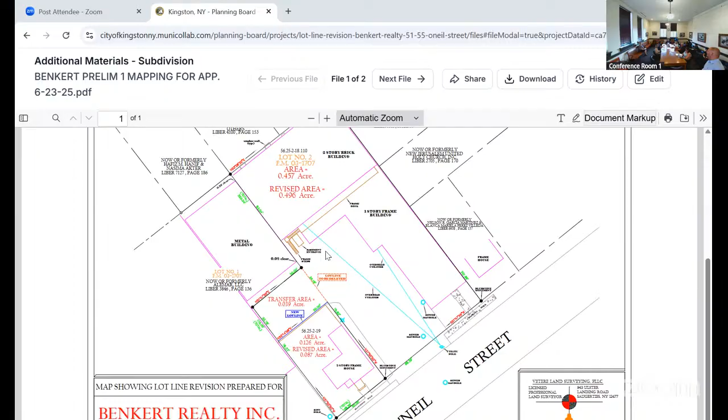Okay, so really it's just a final signature on policy 6 and submit the revised maps as we discussed this evening, 5 paper, 1 Mylar, his signature by the owner, for the chairman to sign, and then the Ulster County Clerk. Quick question, do you want the policy 6 and the board approval block, or do you want both? Because I feel like sometimes we get signatures here and then this is blank and the county asks why that's blank. That's happened to me maybe once in the last 6 months.

So there's an owner's signature block and a chairman's signature block. They should sign both. Okay, that's fine, so I just didn't know that for final maps, if I should be removing it. No, we can have a revised policy.

All right, so that is a motion. Do I have a second on that? Second by Andrew Harris. All in favor? Aye. Opposed? Carried. We're gonna do one more item before we get to you for Hooker Street, all right?

Okay, no problem. It's gonna be tabled anyway, so.

Item number 3 is 15 Apple Street, subdivision of the lands of IFMH LLC. Section block and lot is 48.312-2-10. Transect zone T3N, Ward 1, SEQR determination. Michael Vetere is the applicant, IFMH LLC is the owner.

Do we need to ask if anybody wants to speak on that, or can we just proceed? No, I would just, you're going to table it. Yeah, the applicant has requested this item be tabled because they're going to reconfigure the subdivision itself. The layout will be changing, so it'll continue to be a public hearing next month with the new proposal. Mike is working on that for them too, so he's gonna do that.

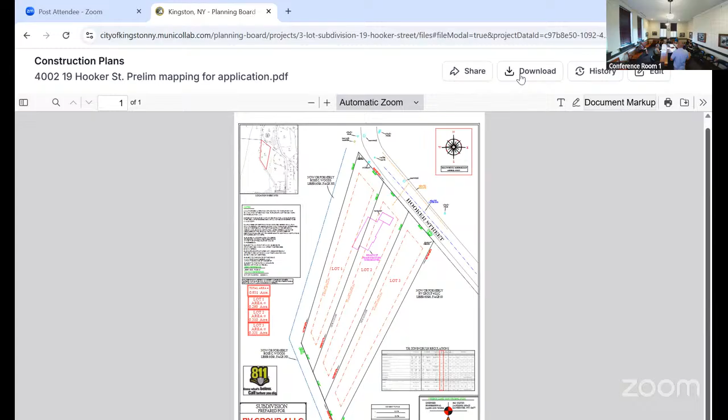Sue's got some conditions: with board policy 6, with the resultant parcel descriptions, including the easement language within the 2 parcels that would cover. Demolition of the existing structure must be completed prior to the chairman's signature on the final plat before filing. We'll need 1 Mylar and 5 paper copies with the owner's signature. Condition of the New York State DEC wetland jurisdictional letter being received, submitting the revised maps showing that shared common easement driveway, and DPW's approval on the curb cuts.

But that's a motion. Do I have a second? Second by Sage Dukert. All in favor? Aye. Aye. Opposed? Carried. So thank you, and if you can just give me those notes eventually.

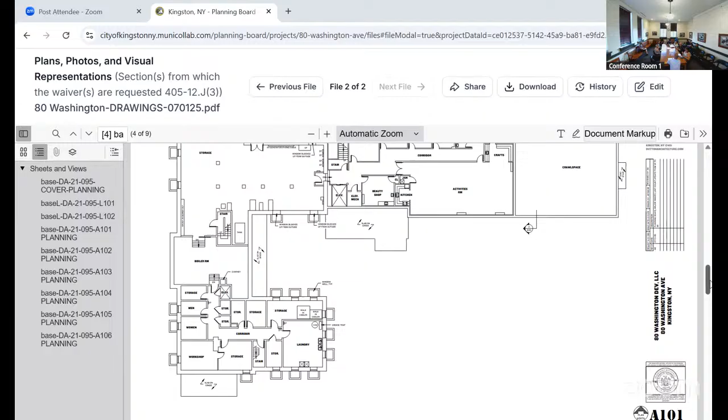The additional 2 units came out of the SHPO process, where they asked us to maintain the original lobby and reconfigure things a little bit. Going through financing and looking at everything, in that shuffle we found a space that's in the basement, but it's not really a basement. It's on the George Washington School side.

Large windows, lots of natural light. So here's another potential studio. There would be no changes to the exterior. The board granted the approval. There's one additional unit on the half level down, actually.

Hello there, welcome. Have some.

There's a half flight of stairs here that brings you right up to one of the main circulation corridors. Did receive staff notes, and there was a question asked: would this be for the building super?

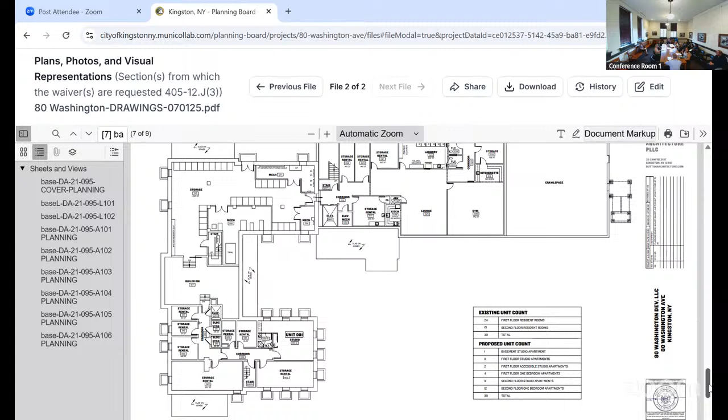The other unit being added is on the first level, basically above the area we just pointed out. It was a one-bedroom, correct, and it's being converted to 2 studios. So that's the other additional studio unit that's being added.

And that's effectively it. I think everything else is staying virtually the same, outside and inside, in terms of the layout. Those are the changes.

Pretty subtle. I don't see it as a problem if it doesn't impact safety and doesn't change the structure. Having the diversity of the type of living spaces, studios, I think that's a positive thing, especially for the hospitality industry.

Just a couple of quick questions, just to confirm, because obviously we're still committing to the 15% affordable and 5% workforce. Yep, that was in the original, so the only change there would be 6 affordable now and 2 workforce with the additional units. That's in the drafted resolution, which is also in your packets, that you can see.

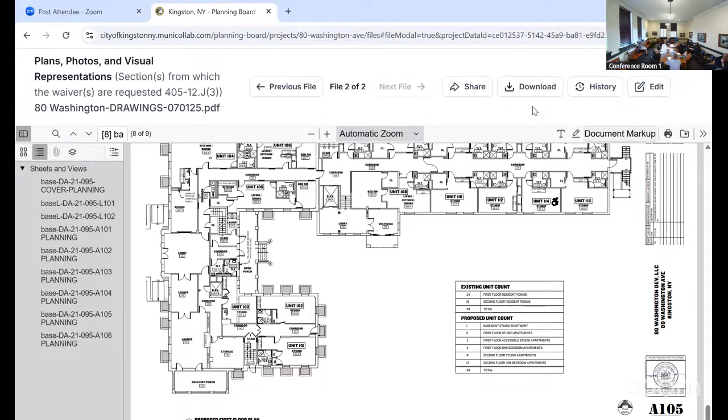So, resolution of the City of Kingston Planning Board amending the conditional approval of the site plan and major waiver to increase units from 37 to 39 for 80 Washington Avenue, Kingston, New York, 12401, section block and lot 56.107-4-12.

And whereas the original planning board resolution on October 16, 2023, included a number of conditions and findings granting a waiver from section 405-12 J3, which is multiplex allowed intensity, for 37 residential units.

And whereas since the original approval, the owner has successfully had the building placed on the State and National Register of Historic Places and has begun necessary demo and clean out to prepare for construction. And whereas in working with the State Office of Historic Preservation to preserve additional interior architectural features and reviewing the approved interior plans, the applicants are seeking amendment to the approved site plan and major waiver to add 2 additional units.

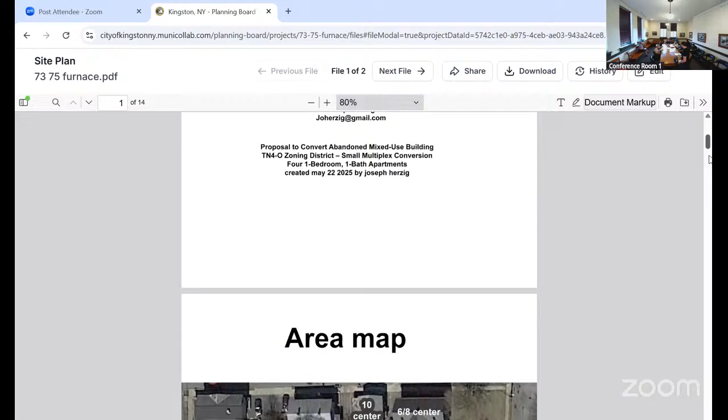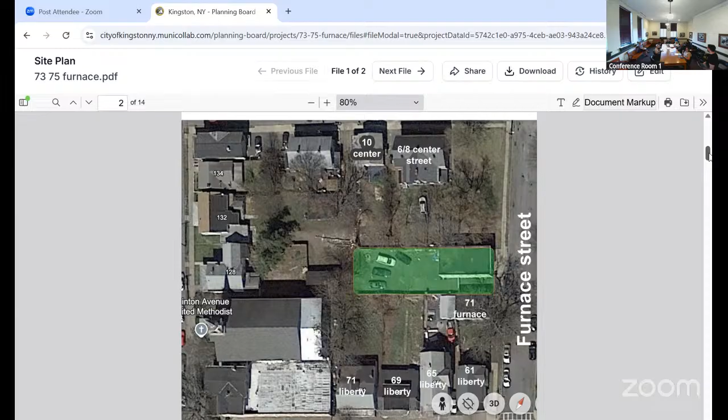So I'll just go through what you originally submitted, and if you want me to speed it up or move along, just let me know.

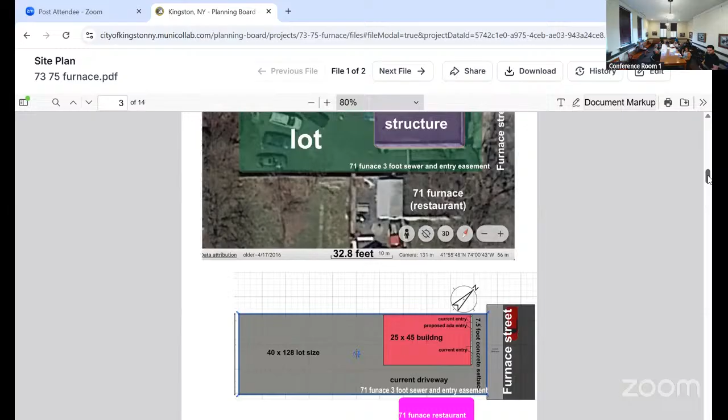So we kept the existing structure as is. This little easement over here isn't really relevant because we're keeping this as a driveway, but the neighbor could use it. This is just a diagram.

So I guess this is the first decision the planning board will have to make. We're trying to keep the very large backyard over here, and in a perfect world we'd put in 4 parking spots, but it gets a little tight with technicalities, especially because we need a handicap spot. So we want to do 2 spots over here, and there are 2 possible configurations.

One configuration takes up this area and has a lot of asphalt in the back. The advantage is that we have the full 24 feet required for the lane before the parking, according to zoning laws. The problem is that we go over the required maximum coverage of 70%, and I think it personally looks a little ugly to have that much asphalt.

I want to show you the second option. This is a much more compact way of having these parking spots. The compromise is that we only have 22 feet instead of 24 feet, but with this option the 22 feet can be authorized with the city engineer's approval. That would be one condition.

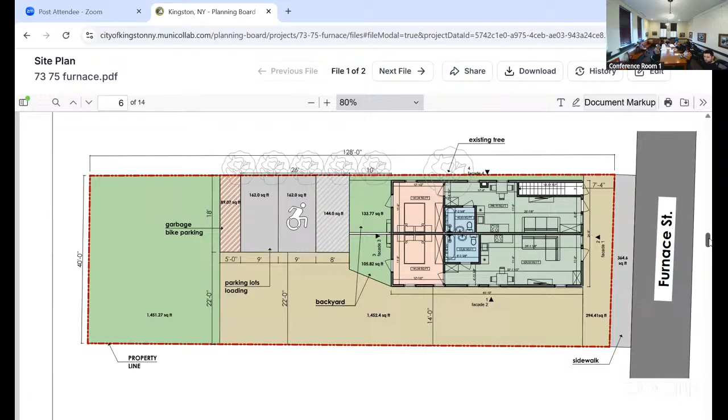So, Joe, here is the original. Do you want me to show this and then we'll show the other one? Yes, okay.

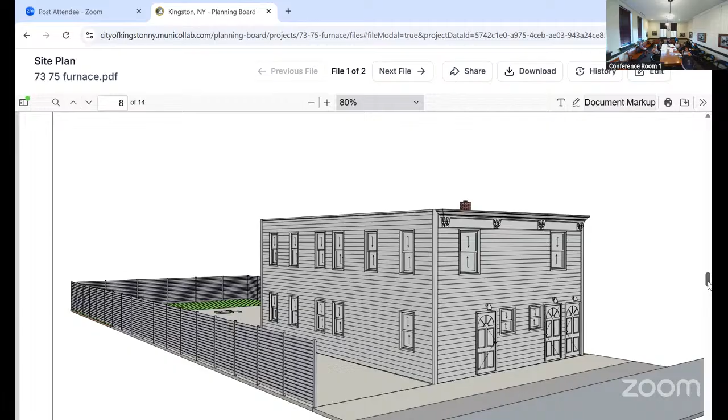So this is where I requested a waiver. Basically, the existing facade of the building looks like this, minus this door. We have a picture of it, it will make things a lot easier.

So this is the existing facade of the building. The upper floor I'm keeping exactly the same. This door I'm keeping over here, this door I'm keeping over here. But I'm adding a second door over here.

My rationale was if I have two — these apartments are like ground floor apartments with no stairs going up. I figured might as well make it a little more accessible if I have a door outside instead of making a door from inside the hallway to a narrow hallway. So I wanted to put this third door in front.

The problem is that this changes the facade a little bit, and being that this facade does not conform to the transparency requirements, I would have to get a waiver from you if I want to keep it as is with the configuration we're trying to do right now. Maybe go back to that picture later so you see it.

Is the transparency requirement just for the street side? Yes, this is facing the street. So the transparency requirement is 30% for the bottom floor, 20% for the top floor. The top floor we hope to keep as is. The bottom floor, obviously, since we're making changes, I would have to get a waiver if I want to keep it as is.

It's quite difficult to make much more windows at the bottom floor because if you look at the interior layout, there's a closet over here, and there isn't that much more space for a window.

That's a bathroom location, it's not there? Bathroom location, but it's facing the street, so I don't want to make it all the way down to the bottom. Oh, this is a closet. Yeah, this is the kitchen. Oh, kitchens, okay.

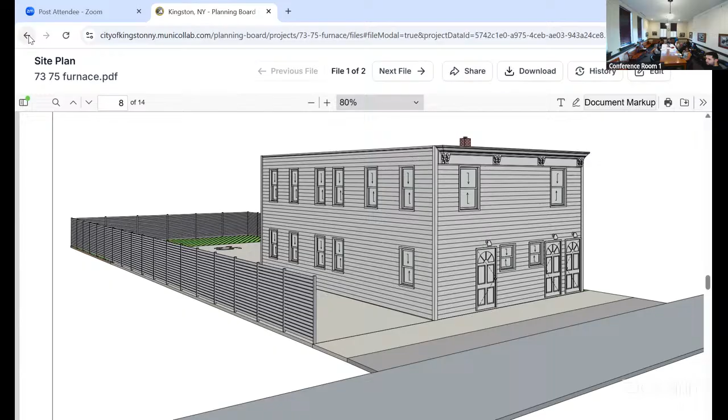Can you flip to this? The other one. Yeah. Right there.

So this is a revised elevation that was submitted today, that just shows basically going back to the two door entries. This is showing the post boxes on each one. So the one to the left would go to the ground floor unit directly in, and that would probably be your ADA adaptable unit. The other would go in and then into a small foyer area and go in that way.

So with this proposal, does that change the interior layout? Ever so slightly. It just means that on this floor, you have to go into the hallway and then make a left turn, instead of going straight.

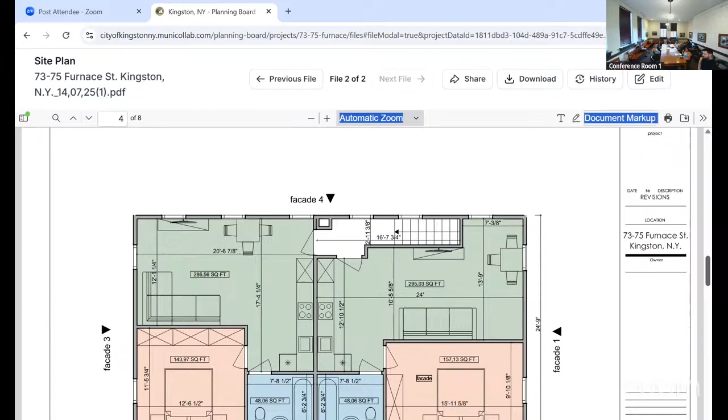No, it's fine. So with the original, you lose the window. Yes. With the three doors, you gain a window, but the interior is the same. Now the total window space is the same, and the interior is basically the same. You're coming from here.

I was going to put a window into here. If I keep the original, that would require transparency review, and if that waiver would be granted to me, then I would just go back to not putting any windows and keep everything as is.

So does one kitchen lose a window then? No, the kitchens are centrally located right there. You see, there's a window here, there's a window here, there's a window here, in the middle of the unit. That's the living room in the front. Oh, okay, okay, yeah.

So for the living room, in one configuration we had a door right over here, and this window got smaller, and we added a window over here. The window square footage is exactly the same. In this configuration, we're making no changes to the front - I would just have the door over here, keep this existing large window, and if you guys would let me, I'd add another window over here. But if that would trigger the 30% requirement, that would be a little more difficult.

Okay, so where the arrow is right now, you're sitting on it - so you lose a window there, but the living room gets a window on the bottom there.

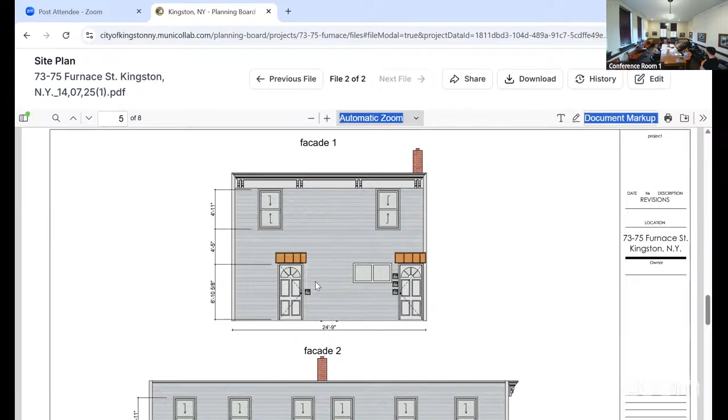The other one added a third door, and what he's saying is he would add another window here if the board would also approve the waiver. And it's not realistic for those windows to go down to the ground because it's the kitchen.

Yeah, I think the lower ground floor having some privacy over here, it's not ideal. And the closet that prevents this one from having a window on this side - is that closet already there, or is it a closet that has to be built?

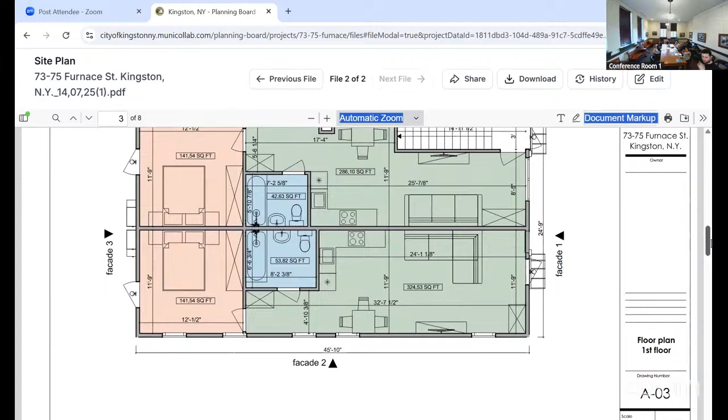The closet's not there, but I guess I could technically change things around. Could the closet go where the other little window would be, and then a window go where the closet is? You're saying the closet should go over on the other side, on the other side of the door? Yes, split. There's no reason you couldn't get a window in - I think that would look better. You think it would look better to have a window at the end?

I know existing photographs of this building show that this whole front area used to be a garage, so it should be quite easy to stick something in over here. There are probably some supports down over here. It will probably be a little more difficult to stick a window into the edges. But once they open up the wall and see what's going on over here, I would love to.

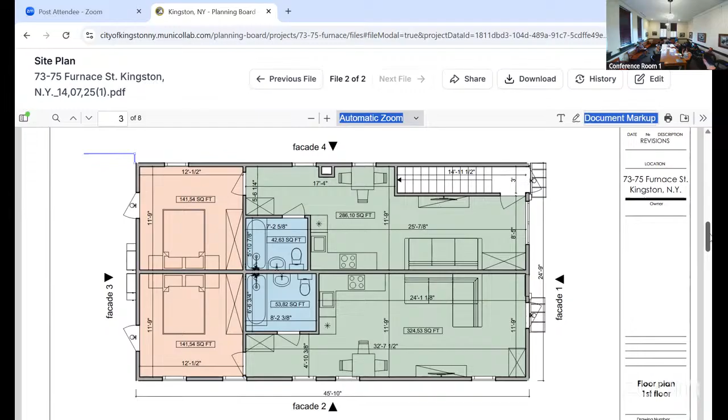I don't necessarily have an issue with the new layout. The thing I would like to see is some landscaping - he's talking about creating a dooryard front style building.

So there is quite a bit of space in front of this building. As you said, where the door on the left is used to be a garage door. So in front of this building is one entire curb cut, and one thing we're looking at is to remove that curb cut to avoid having somebody just pull up and park right in front of the building on the sidewalk there.

If you look at some of the adjacent properties along the street, there's a sidewalk with a tree, with a lawn between the sidewalk and the curb. So if you go down, we'd like to see that pattern extended down to the side of the building, and then you keep your curb cut where you ingress and egress. Those were two comments we had at staff level.

Adding that to the front and putting some low-level landscaping in the front would really create more of that residential dooryard feel, which he's trying to achieve. So I think it's a great idea - I would love to add landscaping over here between the two doors.

Yeah, and then the other thing, as I was saying, was to take that curb cut, which starts basically the whole front - it's a lowered curb - and raise that curb back up, make the sidewalk just continue down like it does along the entire street there, until you get to the commercial building next door. And obviously there's my driveway over here.

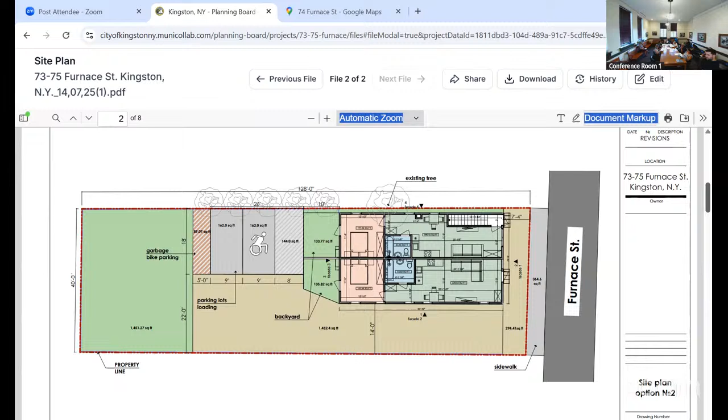Okay, and you have mini split condensers on there? So right now this building is covered in mini split condensers from all sides. Okay. There's a hum coming off the building right now. You know what? No, just kidding.

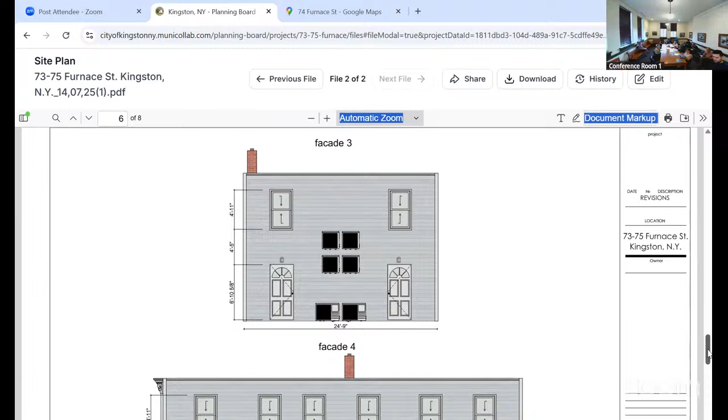Anyway, but yeah, we're trying to put them all back. I spoke to some HVAC companies and they're fine with the ideas. And that's code required. Yeah, it's most convenient, I think it's just ugly to put it inside. Okay.

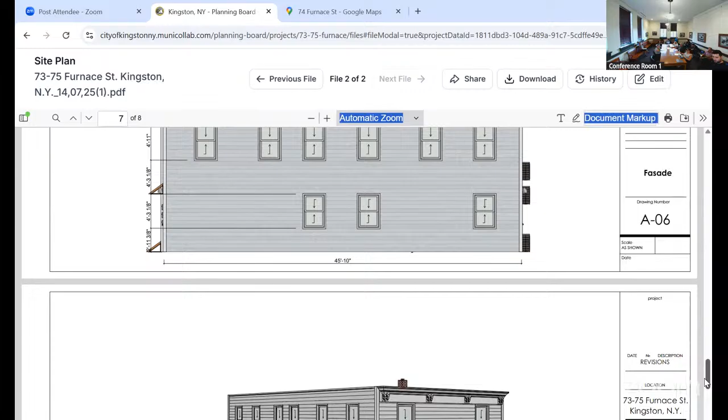We're happy you're doing something with this building, that's what I'm hearing, because this building has been before us for different things. So it's good that this looks good. So this is the last time before you guys. Yeah, you got anything else? Any other questions from the floor? Okay, that's what I was thinking.

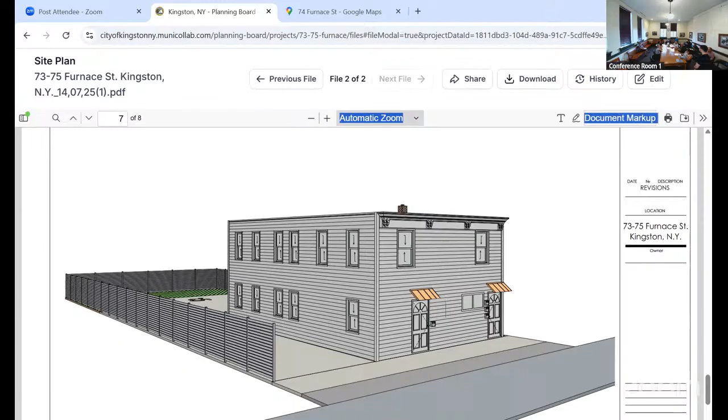So that's a motion. Second? Second by Kyron. All in favor? Aye. Opposed? Carried. Okay, alright, move on.

One more thing. No, you can't leave this early. Come on. So, do you want me to read off the conditions?

Yeah, do that first. Okay, so there are board policies 4, 4A, 6, 7, 13, 18, 23, 24. The parking layout that was chosen will be with the spaces adjacent to the adjoining property. There's a 22-foot access aisle, which will require the city engineer's authorization. And they'll swap the handicapped access aisle with the parking space in the rear to allow better accessibility to the refuse and bike storage area. They'll add landscaping along the front of the building and continue the landscaping along the street edge in compliance with adjacent properties, and that will get approval at staff level.

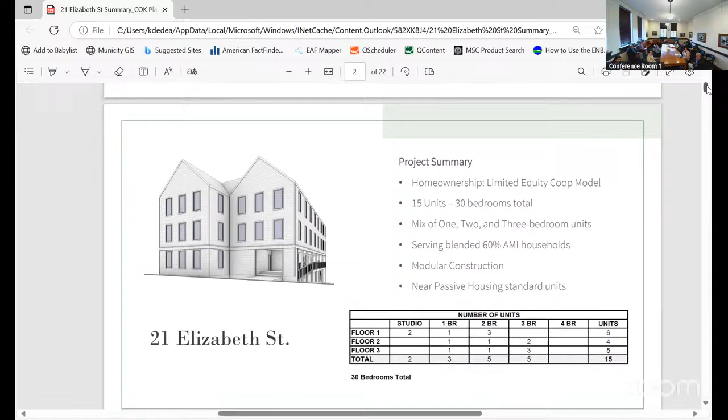We had an RFP, and the intent for the project is serving households at 60% AMI, which is about where the average income for City of Kingston residents is. So we wanted to make sure that was part of the project. As part of this proposal, we've got some innovative approaches using modular construction for the development, and a near passive house standard. That's a breakdown of the units by floor. Go to the next slide.

It's in the T4N transect, and part of the approval application process will be requesting, I think, 2 waivers now. From my understanding, that first floor height of 12-foot minimum to 10-foot minimum, it's coming down the line, so we may or may not need a waiver for that as well. But what we do need waivers for is moving from a maximum of 12 units for the building itself to 15 units.

The architecture team and the design team can explain why we want to take that approach for energy efficiency and other reasons. We also need a waiver in terms of the building depth, from 75 feet max to 112 feet. Right now the existing building is actually over that 75 foot already, so we're outside of that, but we need that waiver for the extension.

And then just the last piece before I hand it over: there's not a ton of room for parking on the site, so we had some concerns about that. We are in discussion with the Kingston City School District for an easement on the back of their parking lot that would allow parking space for our property. They seem amenable, and we're going to formally present that, I believe, in August.

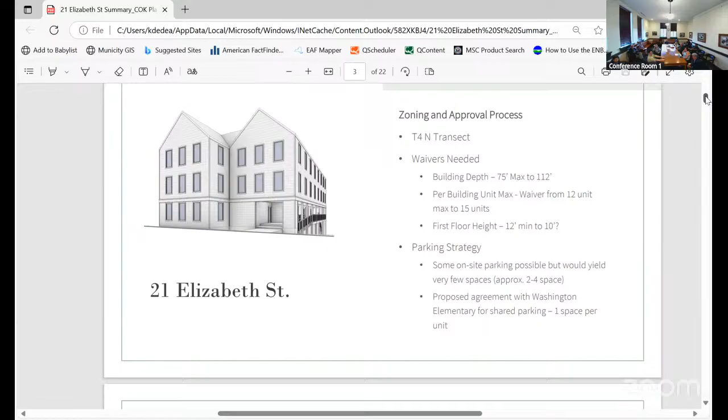And I guess the last piece I'll mention is that there's a general intent, even though it's not required, to move the project in line with the guidelines for the Kingston policy in terms of selection for homeownership. So we're trying to make sure that the majority of residents who end up owning the units are coming from Kingston, if possible.

The other entity not mentioned on the development team is the Ulster County Housing Development Corporation, which is likely to play a role here, similar to the role it played in the Golden Hill project. The legislature at its last meeting approved the ability for that development corporation to take title to the property if and when we're able to move forward.

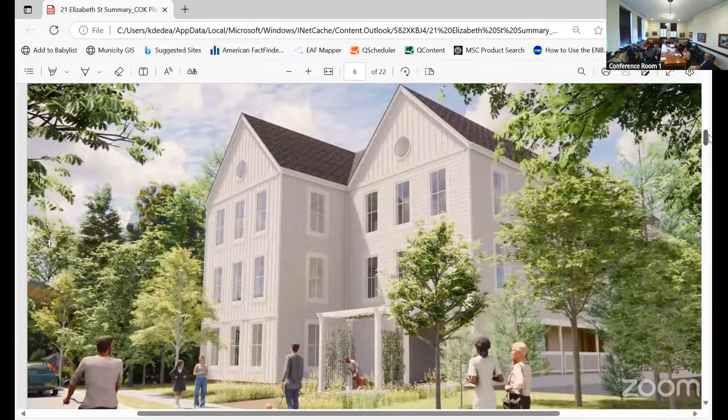Okay, or what might be—so these are ownership units. It means that people need to desire them, they need to buy it, and then they'll take care of them and call them home. So they need to be designed as the kind of housing that people aspire to live in. And that's the way we started with the apartments themselves, because ultimately, I know this is about the context and the urbanism, but it's also about what it's like to live in this house.

And so we've designed them according to contemporary standards of amenity and space and performance, including the passive house standards, because those are actually great for the long-term maintenance of place. And it's great, especially for 60% AMI homeowners. It's going to control their utility costs in a large way over time. And that's really important. So like everything, there are many consequences to any move you make in design.

Then these units really need to come together into a building that gives them a great sense of identity and that it takes its place as a really good neighbor in the community, on the street. And that's obviously the focus of what we want to discuss today. How is it going to be that good neighbor? And actually, the performance-based code has helped us a lot in describing what that means.

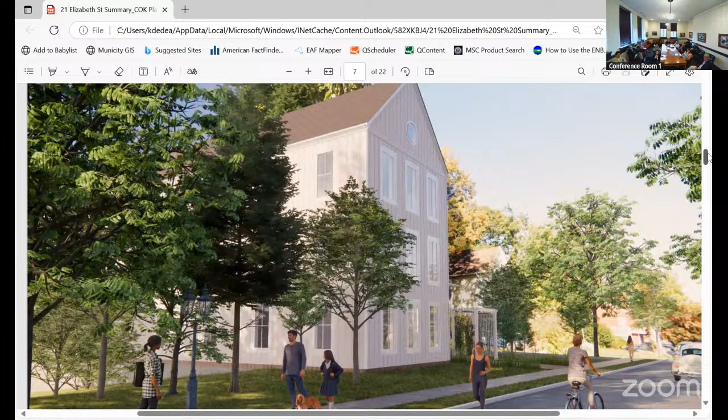Oh, we have 2, great. So here you see - I forgot we have this on the front - you can really see when you're coming from the corner, and it works a little bit the other way too. It's really introduced, and you can see the first volume, the first twin, is introduced as the identity of the project. And then you can see another house down the street a bit that is similar, and we have more images. You can also see here the slope.

Which is another part that made it a little difficult to get the views, and also has something to do with the parking, the difficulty of parking all over the site, because you can see the slope that goes down all the way to the end.

So the next slide. Oh wow, these are all front. This is fabulous. So I thought they were on my presentation, they were at the end. I didn't realize they were front here. That makes it really easy. So they're twin houses already, right? We're just another set of twins.

They're across the street. And then you see the massing, the 3 windows, and you also see the pitch, the kind of very prominent dormer with a little window in it, and that house, which is our neighbor, et cetera. And these other houses are right across the street from us. Oh well, the one is next door.

What you see here is how, first of all, the porch is covered, right? So that means you can hang out there. There's a bench there, for if you need to get a taxi, or you're waiting for a friend, or you just want to hang out. The beginning of the porch is quite wide, and it's a kind of true gathering space.

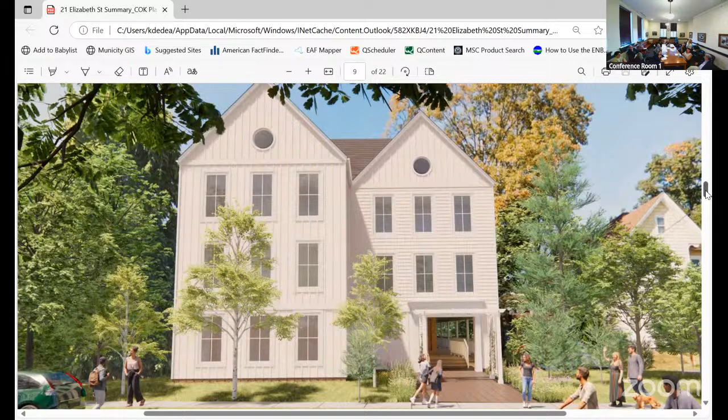And then next to it is the ramp. So the ramp was given, we have 4 ADA units on the ground floor that were all directly accessed from the porch. So that is really part of everyone melded in that experience.

And then, but you know what? It's never just about ADA, because if you have a kid with a stroller, right? Or you have a shopping cart, no matter what your age, or if you're just a little shaky on your feet, that is gonna be a great use. Of course, I'm sure kids will just run up and down too.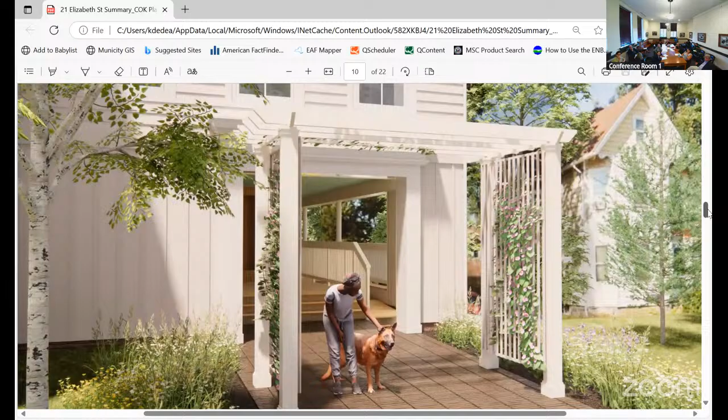And you see it looking all the way down the site, and I bet the next image is a little close up of that experience. And then you see there's the house next door, with the one with the big peak, which is set almost back just a little bit further, but not much further than our design at the moment. It's just the trellis pulls out, and you can see the prospect to the trees through the porch.

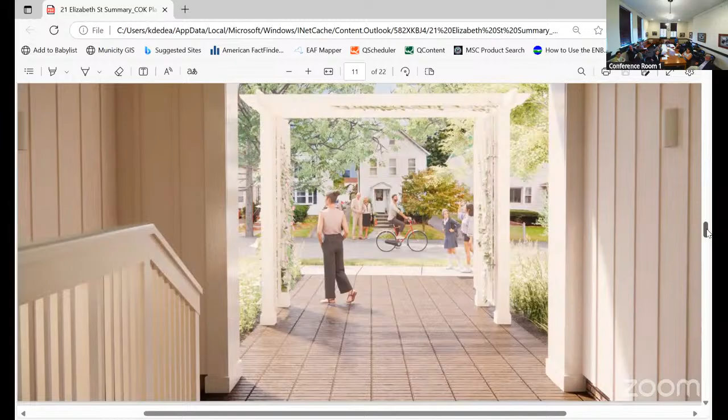Yeah, keep going, thank you. Was that Suzanne? And here's what I thought was going to come next, where you see the ramp and the stair and the covered kind of vestibule that addresses the street, and the threshold of the arbor and that house across the street.

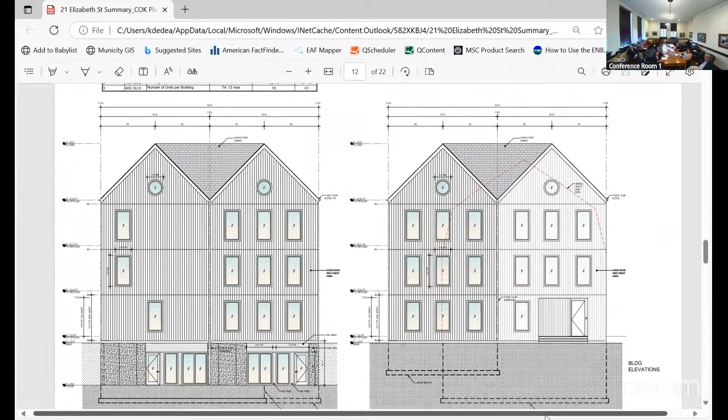So in terms of the slope of the site, it makes it very difficult to do certain things like park, but it gives back. And what it gives back is an extra story on the ground, at ground level at the rear, which just opens directly out onto the rear and the yards. And so we've captured it for our community spaces.

And we have two: we have a community room, and we have a kind of daycare, nursery, after school room, that the co-op will need to structure in terms of how it actually runs it. But we're providing not one, but those two spaces for the community. So that's really the point of these.

Plus it's showing in the red dot where the boarding house sits. Capture some of that space for storage for the units. Oh yes, then so those are these, yes, I'm sorry. That's a very good point.

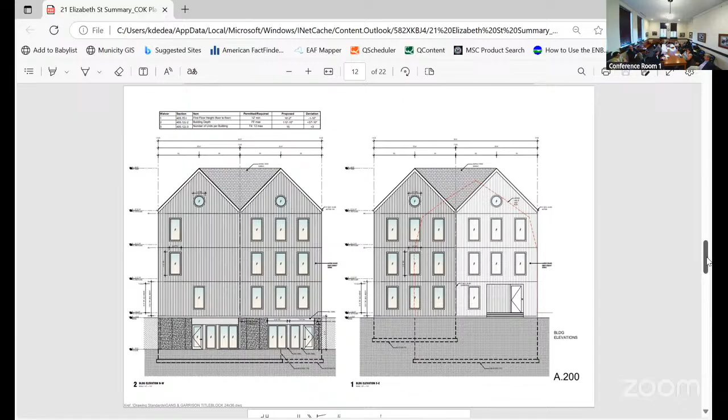It also has a bike room. Right, the mail room, the mail stuff is on the great porch because you want to get your mail and packages and come in and see your neighbors. But the bike room, the mechanical rooms, and storage units for overflow storage for all the residents is in here. Thank you.

Okay, good. We're gonna skip the parking right now. And okay, so could we get the site plan for one second?

I guess it's gonna be small. Yeah, okay, I can load up. Okay, that would be great. Thank you for blowing up the site plan.

There's the basement plan with the 2 community rooms. And they have ADA access down at the end of the porch, there's a lift that takes you down so that all the residents will have access to it, plus it's a great way to bring down furniture and things like that.

Okay, great, so this is the ground floor plan. The thing I want to show you briefly here is the other benefits of that porch, because in a project like this, everything has to do more than one thing. It really organizes the project by having that porch give direct access to either the units, which you'll see on the floor plan, where you have 2 duplexes in the center, then 2 studios.

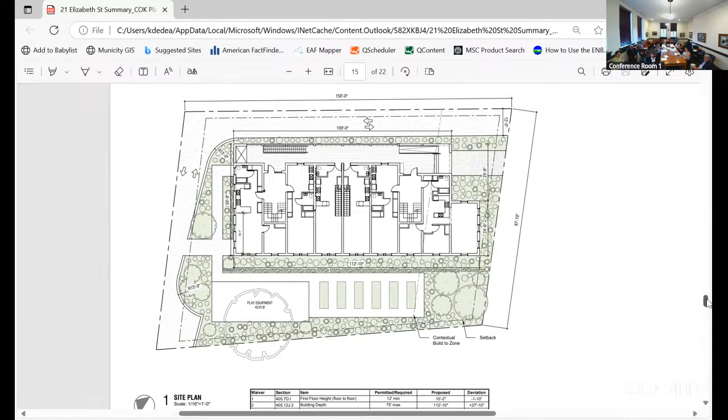I don't know anything else that is... Let's run through the rest of them, I guess. Yeah, let's just move to the next slide. Right, so these are where I was going to talk about the units, but I don't know how much we want to talk about the units.

But you do see that the bump of the twin becomes this great living room, and again it kind of works. The outside form-based code has really beautiful implications for making nice rooms on the inside. And you see anything that has a circle is all about ADA. The studio units have their kitchens set up so, as Rupco says, elder seniors who are by themselves will love having a little kitchen where they can look out and wave to people going up and down the porch—that kind of thing. It's a nice social event.

Okay, the thing I would say is that one of the other things here is the mix of units, with respect to studios, single bedrooms, two bedroom, three bedroom units. That was deliberate. Some of the initial proposals were for a single type of bedroom units or a single number of units. And it also contributes to one of the waivers we're asking for, and that is the number of units. As you consider that, I think it's important to recognize that is the case. That's a really good point, and yes, I can take you through every different unit type in this building, but there are a whole bunch of them for families, for singles.

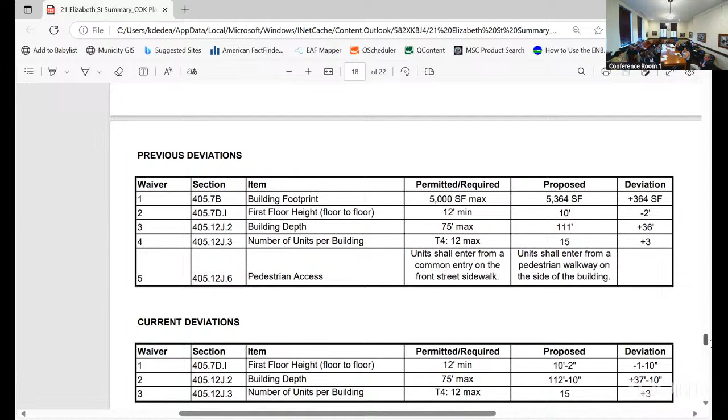But I don't know exactly, but I think within the 15 units, 10 of them are individualized, distinct units. There's no cookie-cutter unit—they all have an independent sense of identity, which is something we're really very dedicated to, and I think it's so unusual in housing.

We put this slide in just to demonstrate we've had some initial conversations with Sue and Kyla about the preliminary designs and got some reactions and comments from them. So these were the previous deviations or waivers that were requested, and then the design team went back and thought about how they could whittle that down and only ask for the ones they really need. So now we're just down to, I think, three waivers that will be needed.

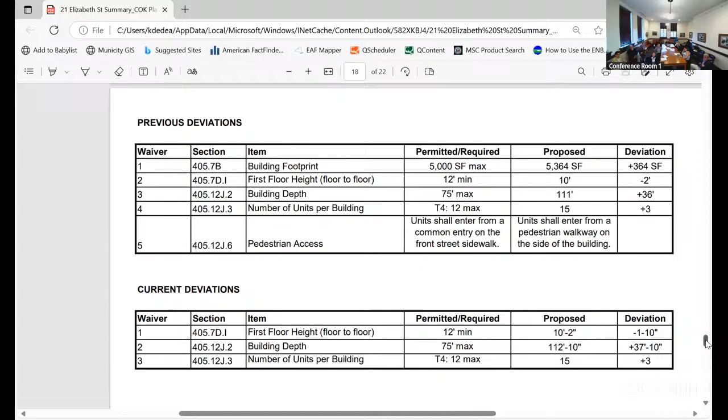Next slide. Right, the other floors—you see there, duplexes. So those are like maisonettes, little houses within the big house, right? Which is a great thing to have for family.

Go ahead. Not sure where we put the parking—we want to go back to that. Yeah, we might have to go back.

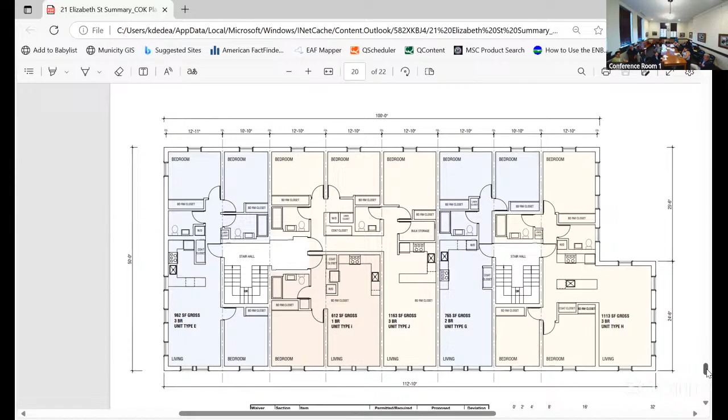Agreement with the school. Do you have an idea of how many spaces that could potentially add? Our discussions with the school have been pretty positive. The idea is that we would have 10 additional units.

Remember, this is ownership. First of all, you don't want 15 families' cars on the street if you can help it. But these are ownership units, and if one person buys their unit with a parking space, it would be really nice if they could all buy.

So you have 14 altogether? We have 15 now. We don't have 15 - the school parking lot right now takes up all this space, but it doesn't use it. It has this huge drive in it.

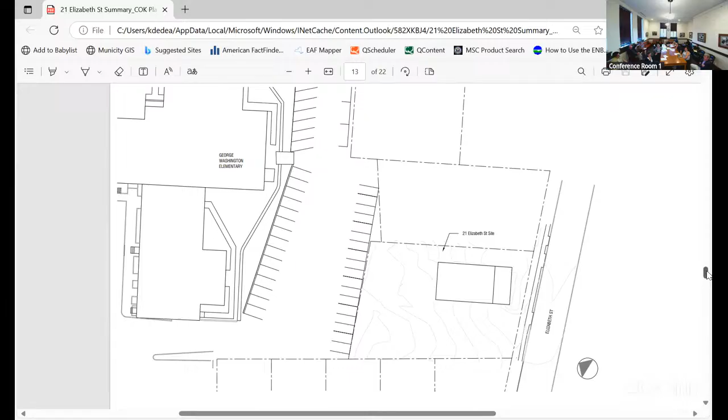Kyla, can you go to the previous one to show the existing? So we're just squeezing it, and we added - the school district actually gets plus 2 units, more parking spaces. And if we do EV, which we might have to for AHOP, there's no reason why we couldn't share school parking. It's actually safer, it's structured.

I've also heard anecdotally that kids - I think technically it's one way but they go both ways - kids who live on this side of George Washington travel through the park too, so this would hopefully design it a little bit better. We could even design it so they have a path.

It's such a beautiful relationship to have a building like this backing onto an elementary school - such an opportunity. Maybe we could get a path this way, maybe a path that way. I kind of see how people feel about people walking through the backyard, but still, we should try to figure out how to design amenities into this situation.

The important thing to recognize with respect to the discussions we'll have with the school is that from a number of spaces standpoint, the school doesn't suffer a loss of parking spaces. And in some instances, a well-organized parking lot is actually better than something where everybody is trying to figure out where the connection lines are.

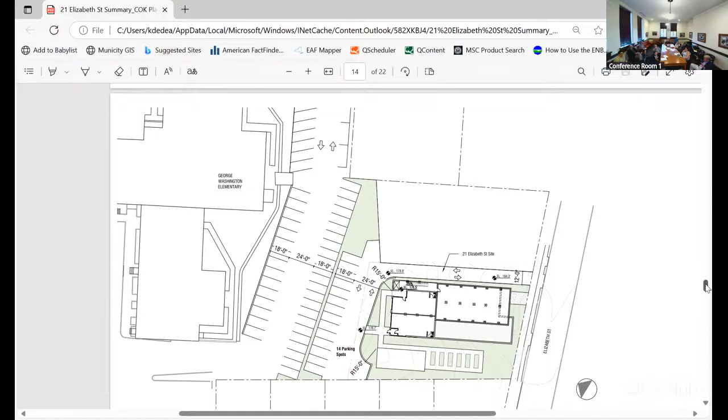Thank you, Dennis, again. Okay, so I'm not sure there's more. Yeah, you have that one last slide. Okay, great. All right, there we go.

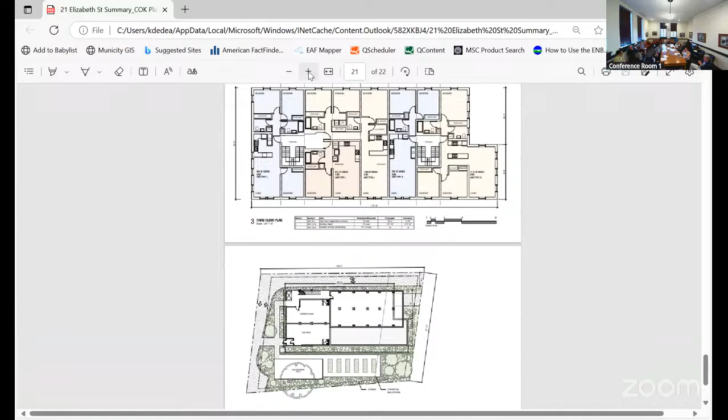It's a little bit of a collage, a bit of a mess of a collage, but we tried - where you see it on the street. We did talk about the technology of sustainability, or the fact that it's modular. We're happy to talk about that. I think it's important that we talk about the sustainability issues.

Part of doing this rather than the muse, putting everything together, that's a big sustainability factor - it's like the adjacent modules warm each other up, and the only thing exposed to environmental impact is the smaller perimeter. We're also sprinkling the building - we're sprinkling one building - and that is a big deal.

So there are lots of efficiencies if you want to reach the level of Passive House, incredible efficiencies to treating this building the way we treated it. In terms of the standards we're hitting, we're going to hit Passive House. We've been talking about whether we'll apply for Energy Star as a benchmark to show what we've accomplished - I think we're going to do Energy Star, but we will be Passive House.

And we're going to do that simply, through insulation, through sealing so not for drafts, very, very good windows. We have it organized to also take advantage of just passive good sense, not just passive technology - the windows face south rather than north, and the portico entry is protected on the north.

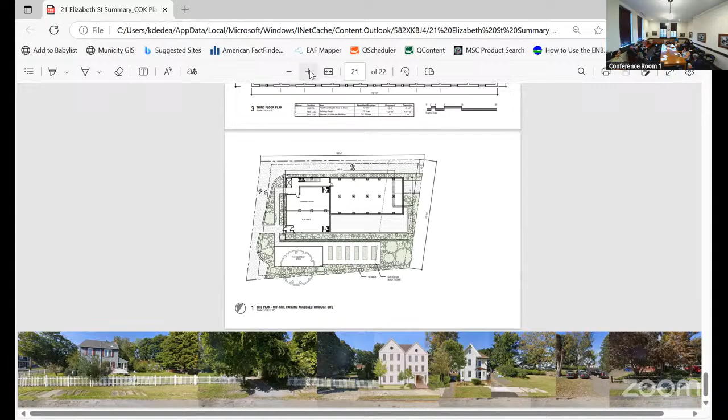The mere mention of the words 21 Elizabeth Street over the decades has made people's hair stand up on the back of their neck. I know you know this. I'm not sure how much of the team is aware of the history of this facility.

But it has taxed emergency services, social services, the building department, countless politicians, and not least, the neighbors around. It was just terrible for that neighborhood.

It's good, I'm happy that the demolition is going to happen. We got a new build, a fresh build here. And if I can use the applicants that came through for 256 Washington Avenue, which is Hart Street, you have to engage with the neighborhood, what the neighbors are feeling, because you've got a lot of old-time neighbors through there.

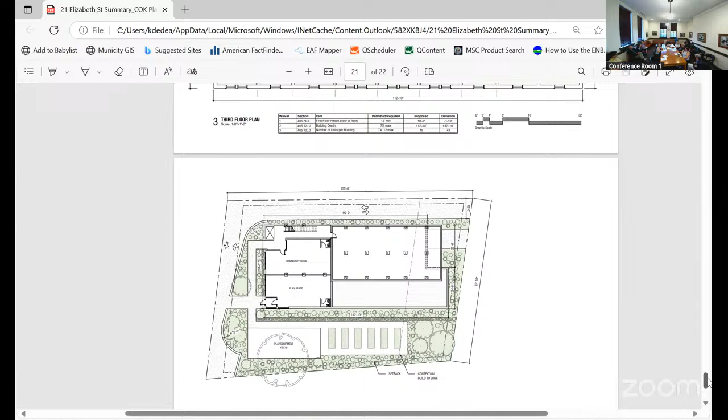So the folks who did the renovation, who are doing the project at Chisholm's Hart Street, I said to them, this is an opportunity. We have a fresh start, and they did a wonderful job to listen to the neighbors, to listen to us, and to convince folks that yes, this is not going to be like the way it was previously. So I think a new build, new construction is going to do a lot to speak to that.

I love the fact that it's encouraging families to come here. It eliminates the revolving door of the clientele that used to be there. Previously the health and welfare of the residents there seemed to be hanging in the balance on a daily basis.

So over the process, you're going to be appearing here, and I'm sure we're going to tweak what the original concept is, and I'm happy to engage your team with that. We do need quality housing, and a fresh start here is really, I think, a great idea, and I'm welcoming the conversation to have with the team and the county.

So I thank you. I'll just note too that right after this meeting, discussing with you, we're going to start community engagement with the neighborhood and planning a listening session for September.